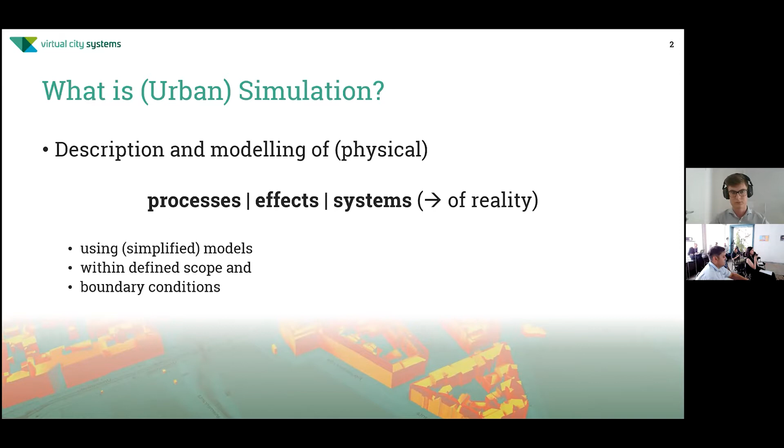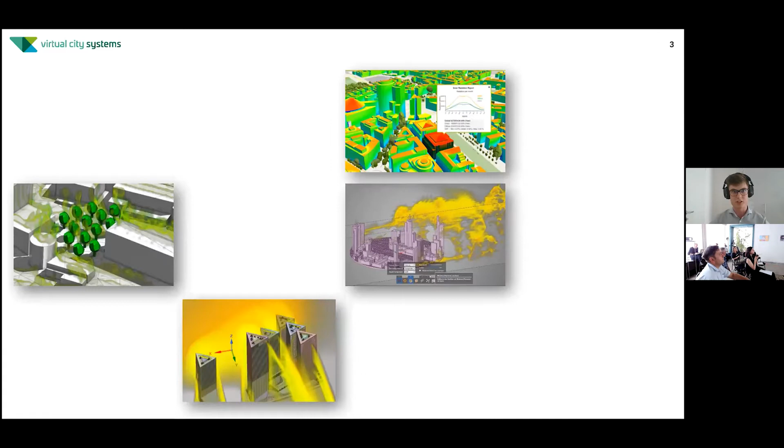There are lots of applications when you think about urban simulation, and in my presentation today I will show you some of them - a first impression of what you can expect from the talk today.

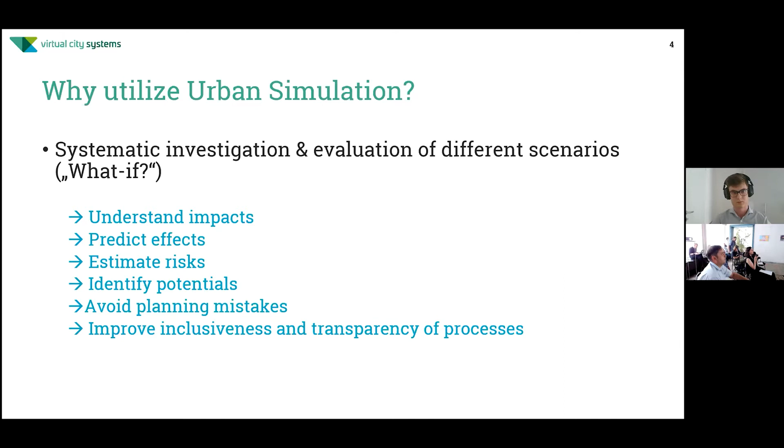But first, I want to raise another question: why should you utilize urban simulation? What are the benefits? One big advantage is that you can do systematic investigations and evaluations of different scenarios - answering what-if questions. By using urban simulation, you can understand impacts, predict effects, estimate risks, identify potentials within your city, avoid planning mistakes, and in general improve the inclusiveness and transparency of processes.

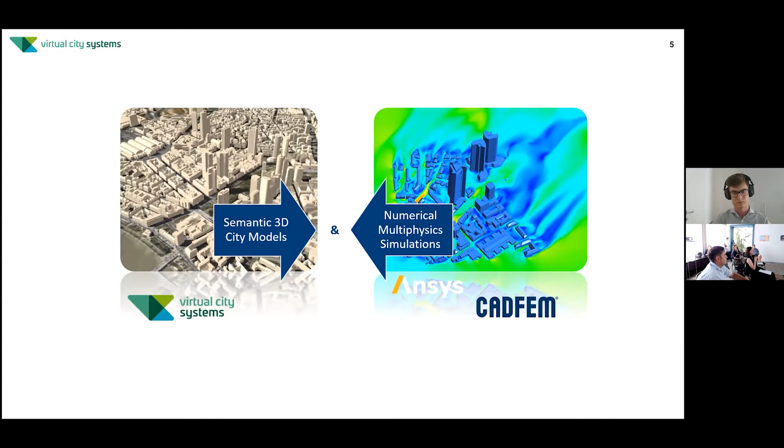In the previous speeches by Antje and Tim, you've heard about our company, Virtual City Systems. Regarding urban simulation, we develop interfaces between semantic 3D city models and numerical multi-physics simulations. For that, we cooperate with various partners who are experts in multi-physics simulations, for example CADFEM, which you've also heard about in Antje's beginning speech.

Now we will jump into some applications. These are divided into three main topics: environmental applications, security, and mobility applications.

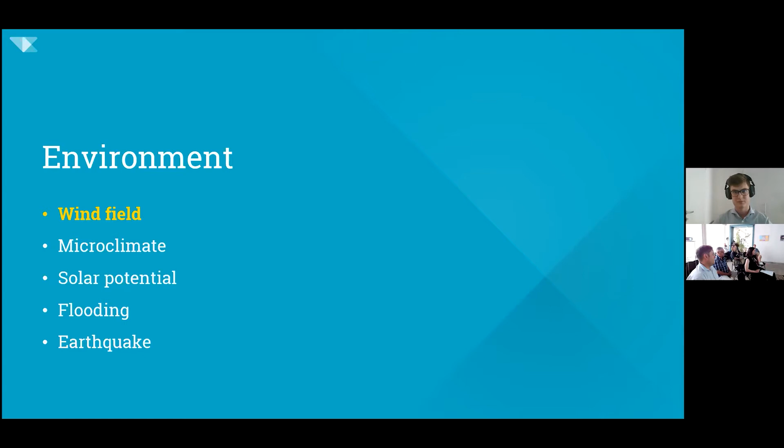Within this environmental topic, I want to first talk about wind field simulation. Antje already told you something about the city of Helsinki and their open data platform, including an energy and climate atlas.

Helsinki did some case studies using urban simulation. They had a planning scenario - new buildings which are planned to be built or now are built - and they wanted to simulate this using wind field simulation, for a district called Kalasatama.

They prepared their architectural models and used software called ANSYS Discovery to perform a wind field simulation and evaluate the effects of those new high-rise buildings. Using this software, they were able to see how the wind would behave in the new development.

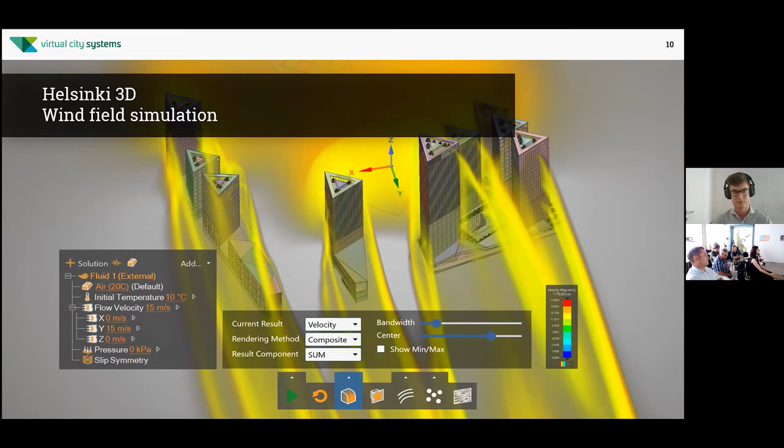And they also compared their simulation results to a classical wind tunnel investigation, done physically.

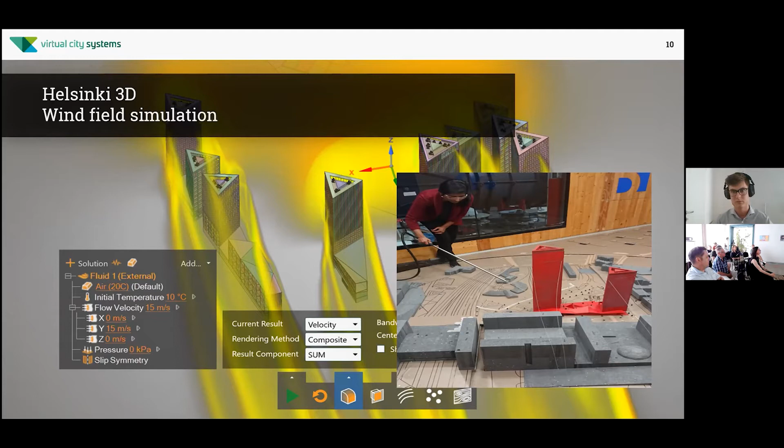And there's also a very interesting report on the internet where they investigated very deeply various scenarios in Helsinki.

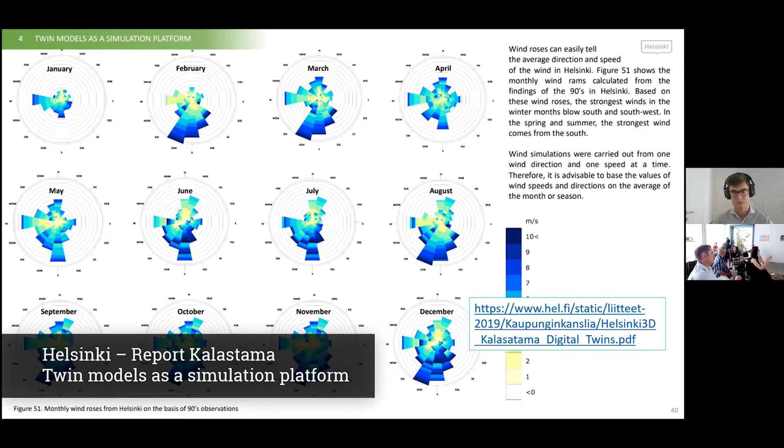Another application was for the city of Rotterdam, where we performed a wind field simulation, and we compared the as-built situation with additional planned buildings, comparing the effects on the as-built situation.

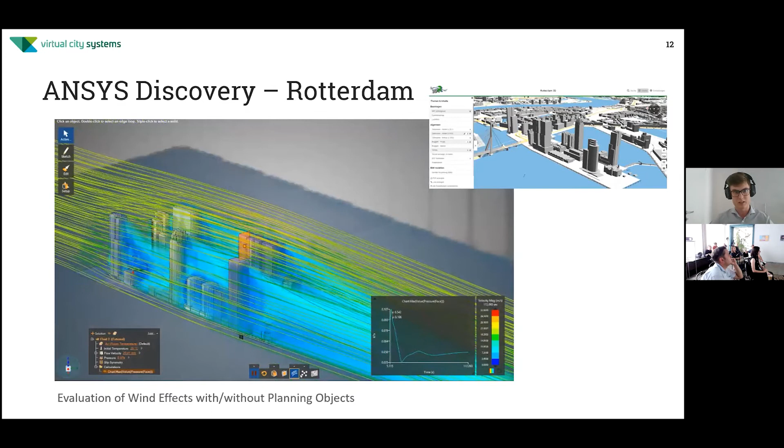So in this diagram here, you can see, for example, the force on this building surface, first with the planned building, and later on the as-built situation.

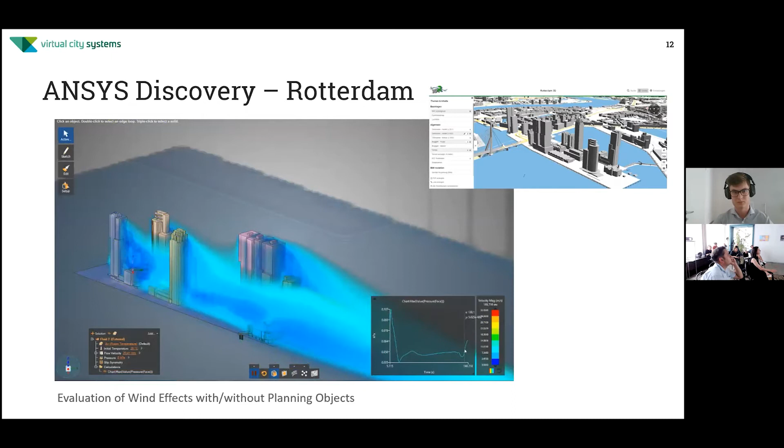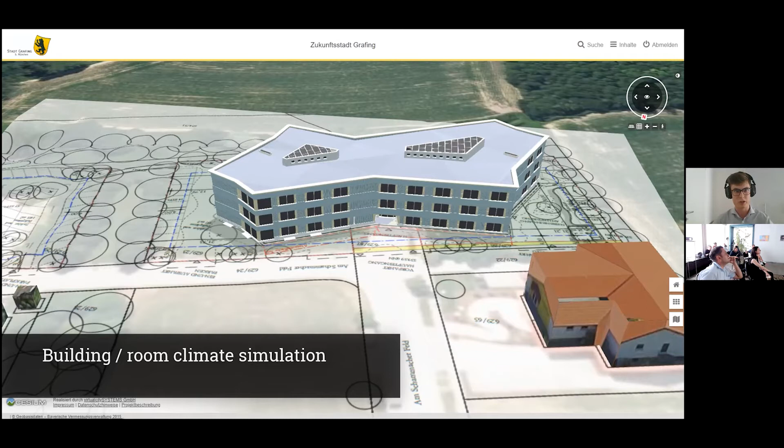Apart from the exterior simulation of wind fields, you can also perform interior simulations, so room climate simulation. This was another example here for a room climate simulation of an office building.

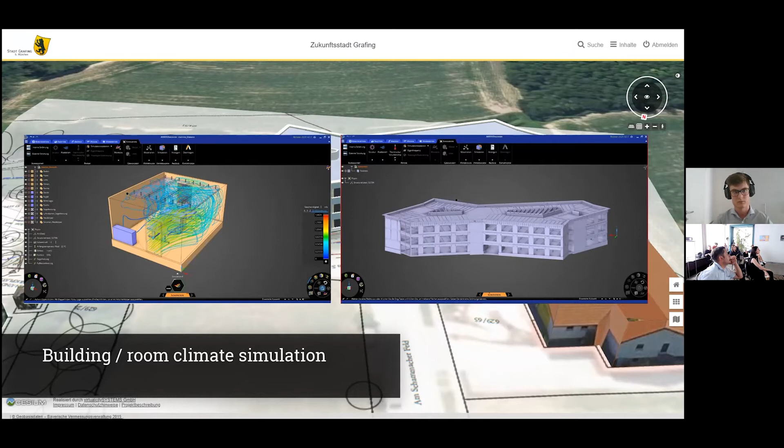The next application is a simulation of urban heat islands. It's performed in the same software, and additionally to the wind, there's also the heat dispersion simulated.

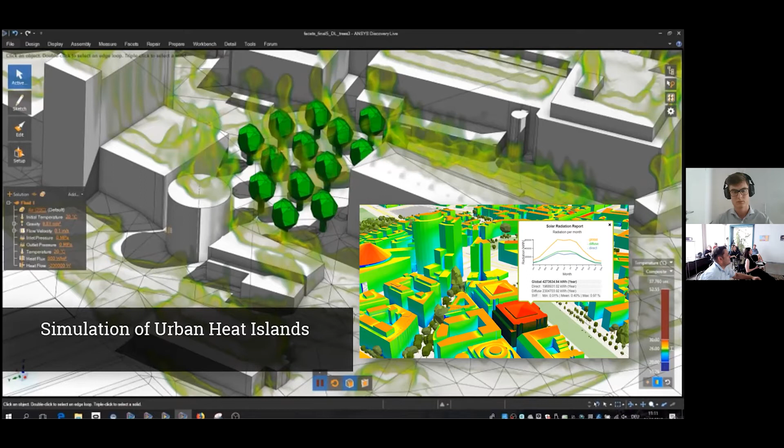And here's also a video on results comparing this urban place without vegetation and with vegetation.

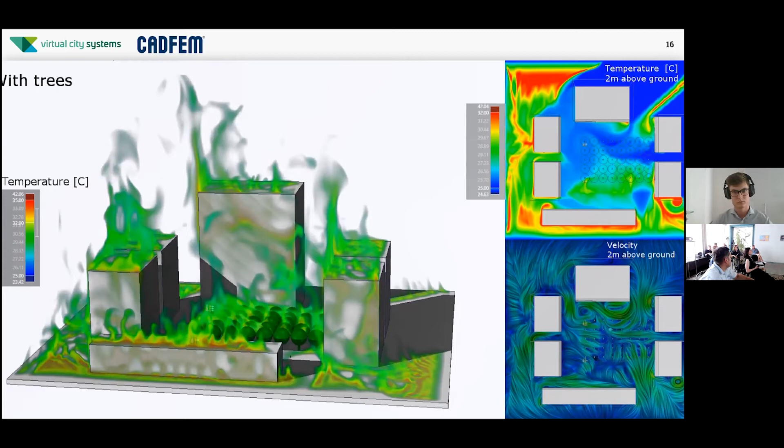One base of this microclimate simulation is a solar potential analysis. So with this, we get the boundary information, how much radiation is radiated from which building or from which location in the city.

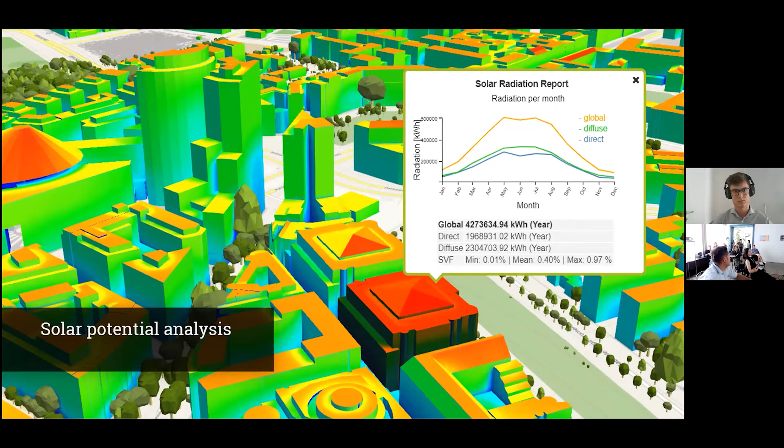So the next topic would be flood simulation. I think that was a question in one of the previous talks. Yeah, it was.

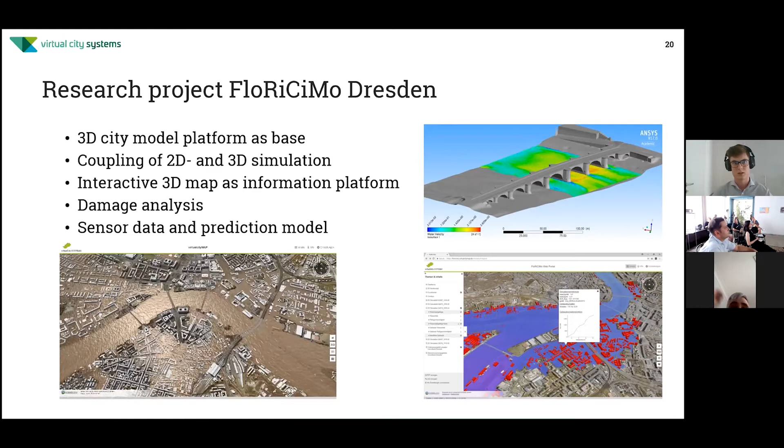And on this web portal, we integrated different types of data: this 3D city model, the bathymetry, the topography, but also within the riverbed, and also land use and geomorphology.

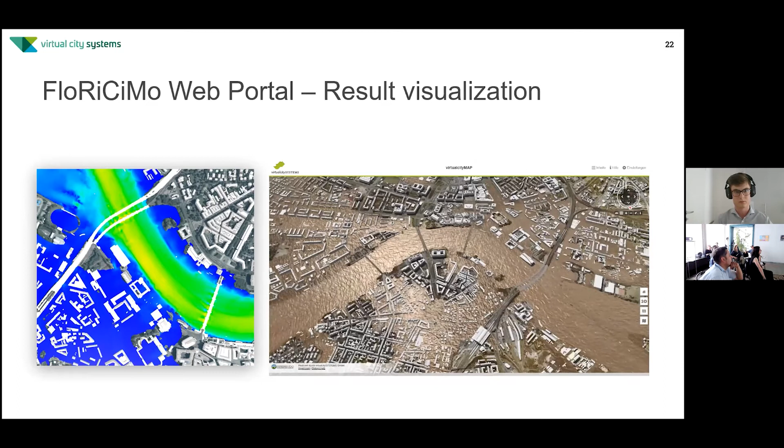Apart from the result visualization, you have some analysis methods possibilities. There's sensor data integrated, and the sensor data also has a prediction model.

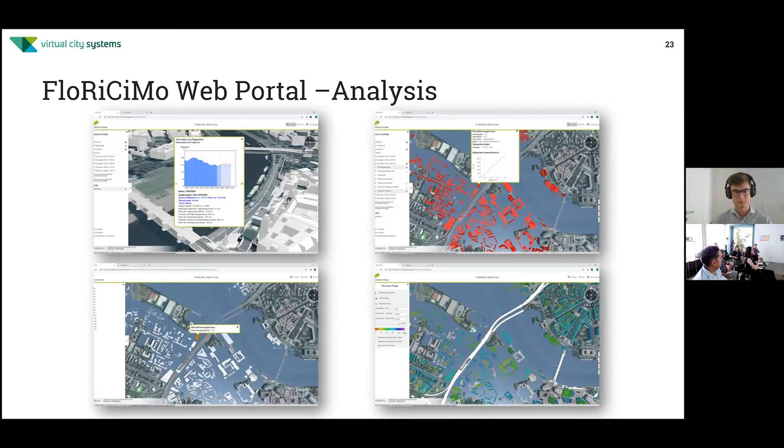The last topic within this environmental field is earthquake vulnerability analysis or simulation, which we did with a partner, the Fraunhofer Institute, to evaluate earthquake events.

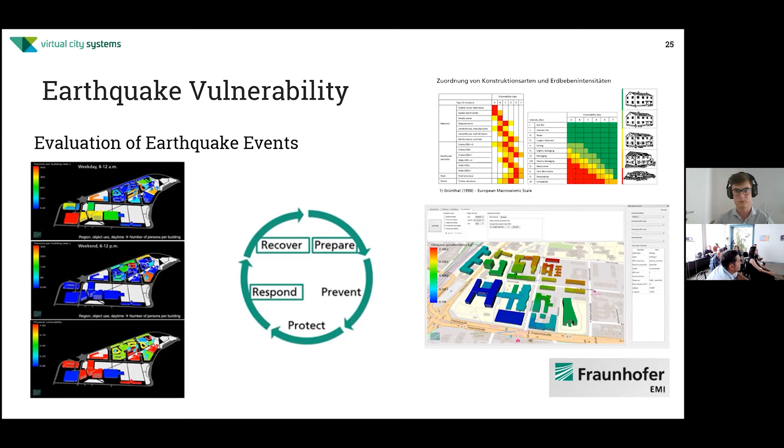Okay, next topic is security. We also have three applications.

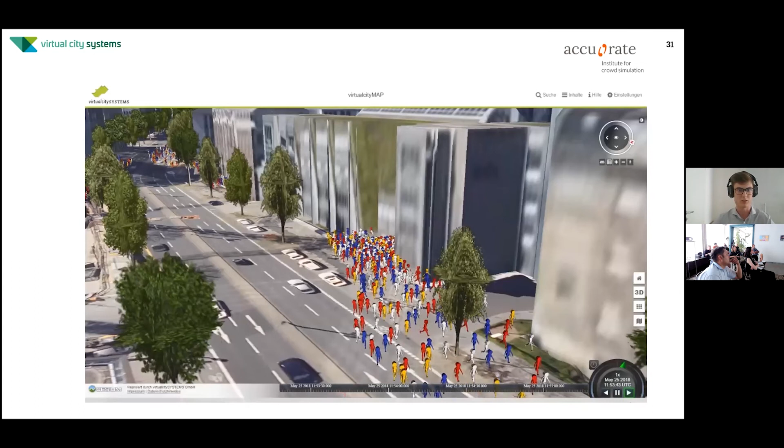The simulation was done in this case by our partner, and we visualized the results of the simulation of this evacuation of the building within the 3D city model.

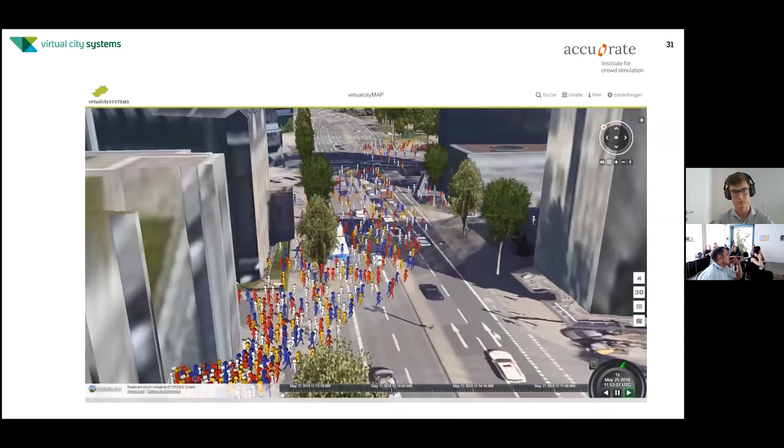Also within this topic, we have another research project on protest march planning and demonstrations, where crowd simulation was performed to plan such protest marches.

Who was planning the protests? Cities or the city officials. So they were planning, for example, the security measures, yes?

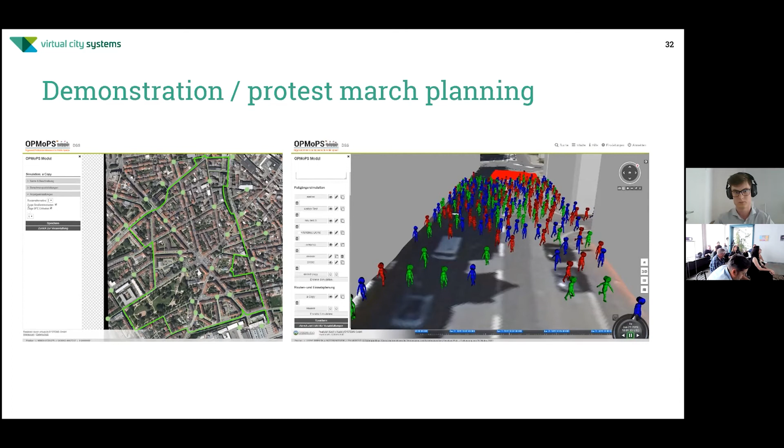And the last application involves audibility and visibility analysis.

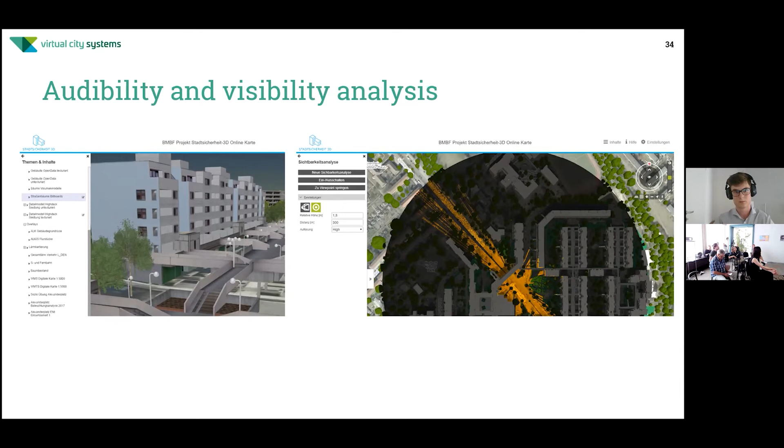Okay, and the last topic of my speech will be mobility.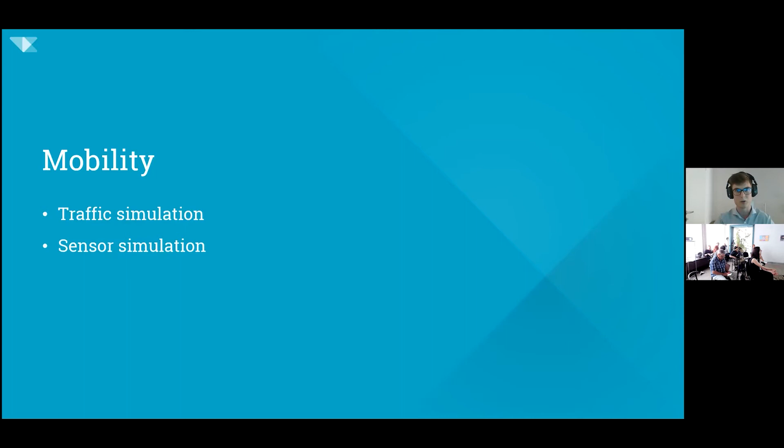So we see the city model as a platform, as a data integration platform, which can provide data and information for different kinds of applications.

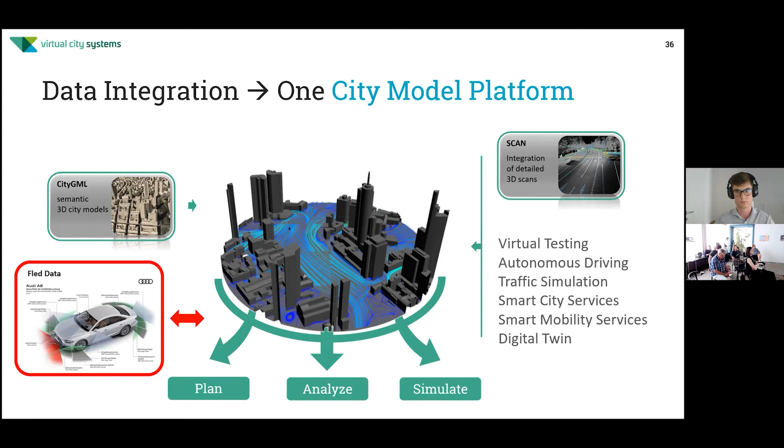Here, for example, we have a result of a traffic simulation of this intersection within the city, which is visualized in the city model. We see the updated intersection and the simulation of car movement displayed directly on the city model.

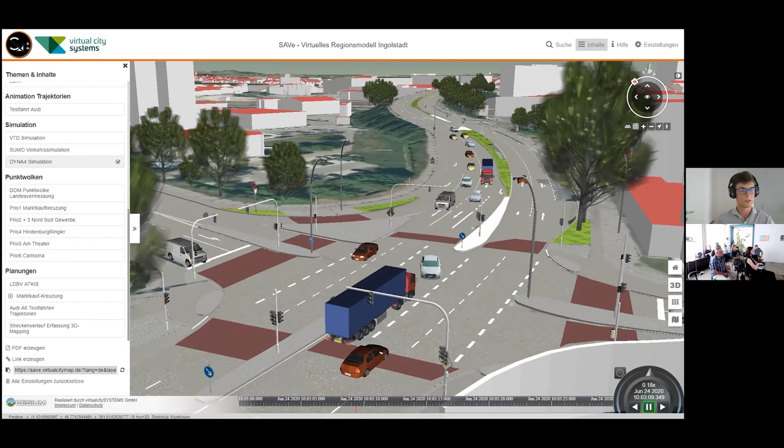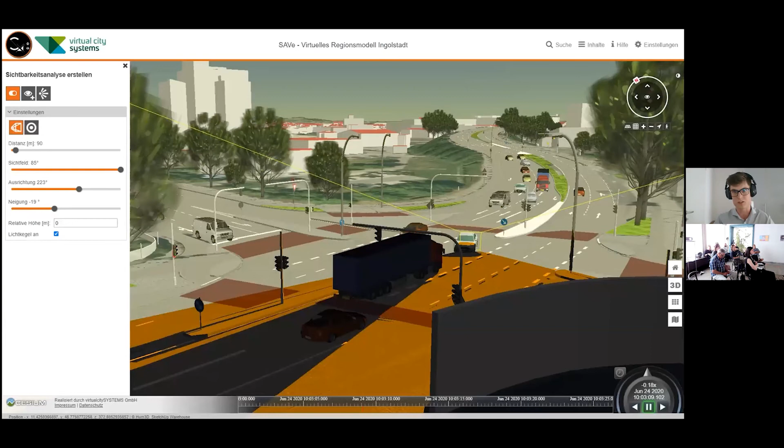This web platform allows you to visualize these results interactively, but you can also do some simplified, very simple analysis using such a map to visualize the proposed solution.

For example, this dangerous situation: there's a car turning left, and you can analyze, as a very simplified sensor check, whether this car behind the truck will be captured by the sensors of the vehicle. This is an autonomous vehicle simulation - we can model whether the sensor on a car will see another vehicle, like this white car turning left, while a truck has a large blind zone not tracked by sensors. This is a very simplified and only visual analysis.

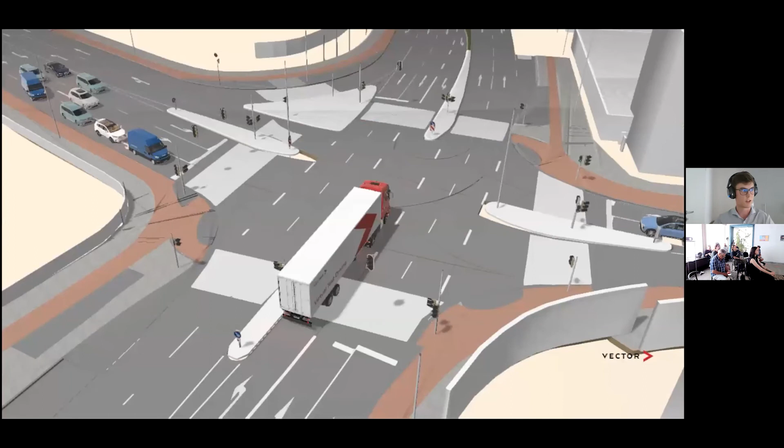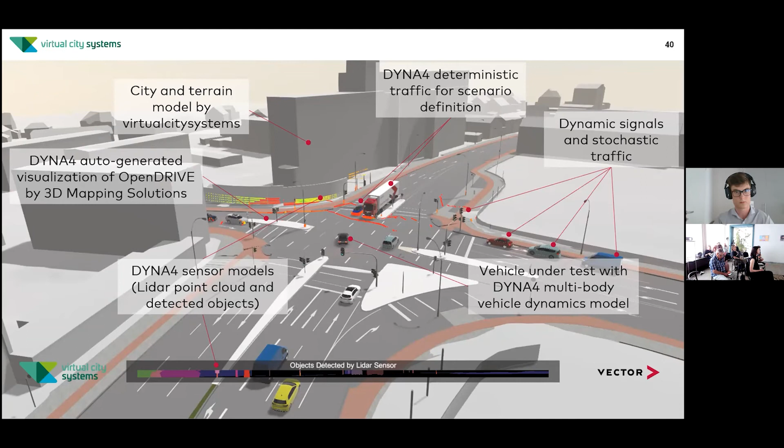But you can also do a physical-based simulation. Then, for example, you can simulate a LiDAR sensor on a vehicle within this city model - LiDAR is a type of laser scanner. Or you can also do optical simulations, so other kinds of sensors for autonomous driving cars.

Okay, so that was a quick jump through different topics of simulations. If there are detailed questions on some topics, I would be happy to answer them. Thank you very much, Roland. I will continue with questions - this was a short presentation about various simulations, just touching the surface. Maybe someone has questions.

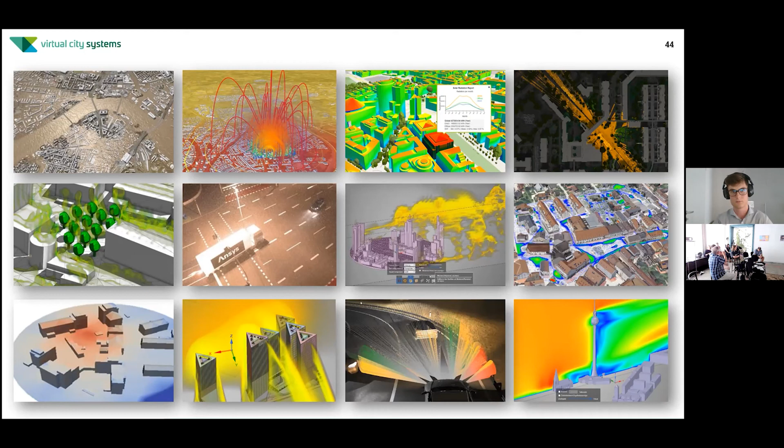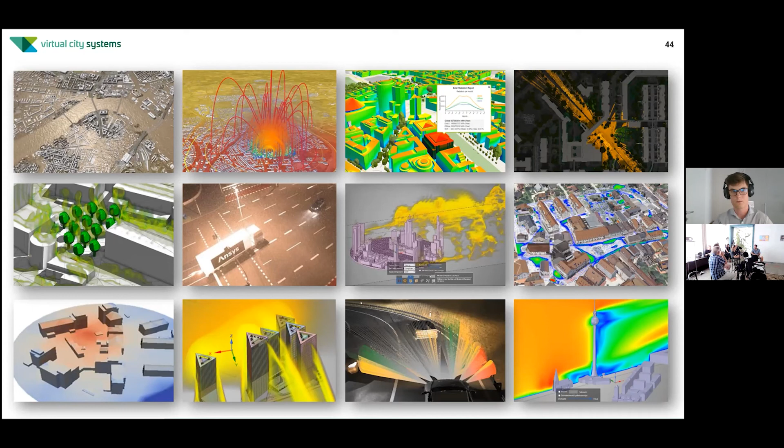Okay, so regarding the crowd simulation, the question is: is it possible to have this simulation not only for protests, but also regarding, for example, peaceful or festival events? And we have a second question regarding this: is it possible to calculate, for example, costs of change of public transport, or the effects of new traffic conditions during these festival events?

Okay, the first question I can answer. So by our partner accu:rate, they simulated big events like, for example, the Oktoberfest in Munich, and simulated events - how would evacuation of the tents on the Oktoberfest be possible, for example? So there are also possibilities regarding big events.